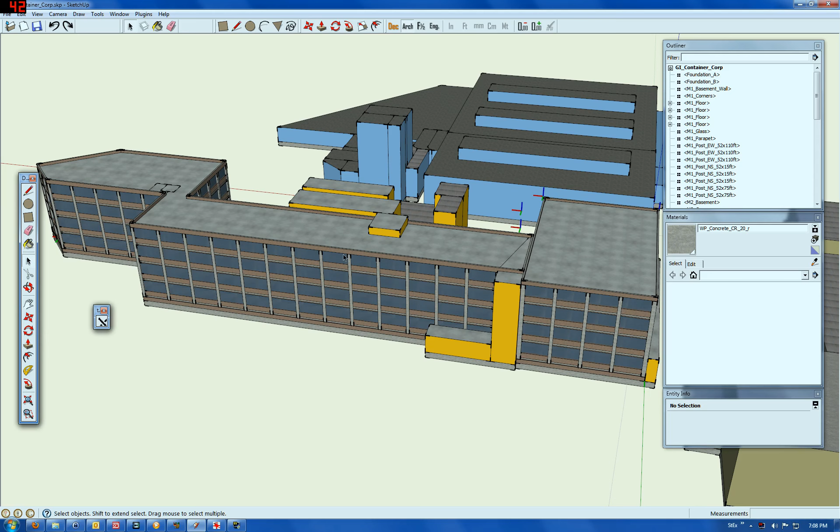As you can see, I've added more details to the mill building. I've basically followed the same techniques that I did before, adding the parapet here along the top, figuring out where the vertical elements go, where the floors are, and so on. I just basically ran it all the way across. Sometimes it was a little bit more difficult to fit in down here on this angled edge, and that's not uncommon. The angled portions of the building proved to be problematic.

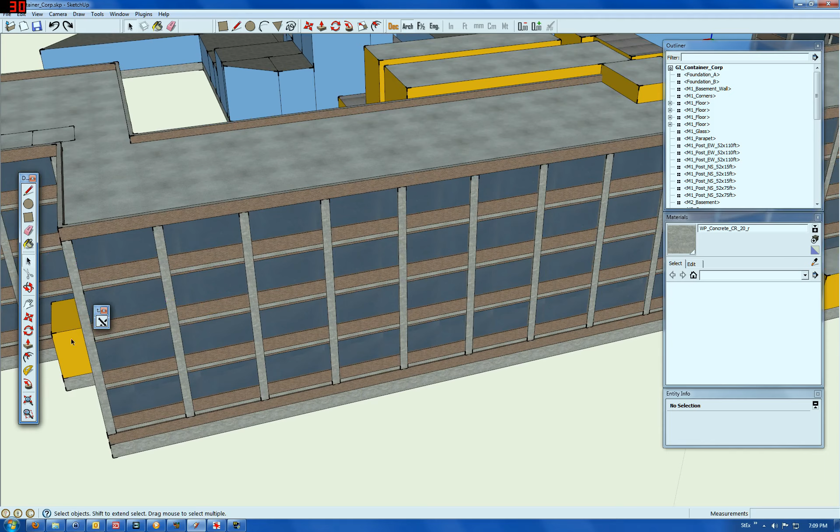One of the things you'll see that's different from what you saw before is there are fewer of these reinforced concrete vertical elements. And the reason for that is when I was putting together this wall, it wasn't going to go together evenly when spaced the way I had done the first building. But if I were to increase the distance, I think I went from a 12-foot span to an 18-foot span. It worked on this face, and coming back here, it worked on this face, and it works over here as well.

And so what I got out of that was my initial guess of using the 12-foot spacing worked initially, but as I continued on working through the model, I realized it was the wrong value. And so I just basically pushed a few things around, removed the extraneous elements, and it's okay now.

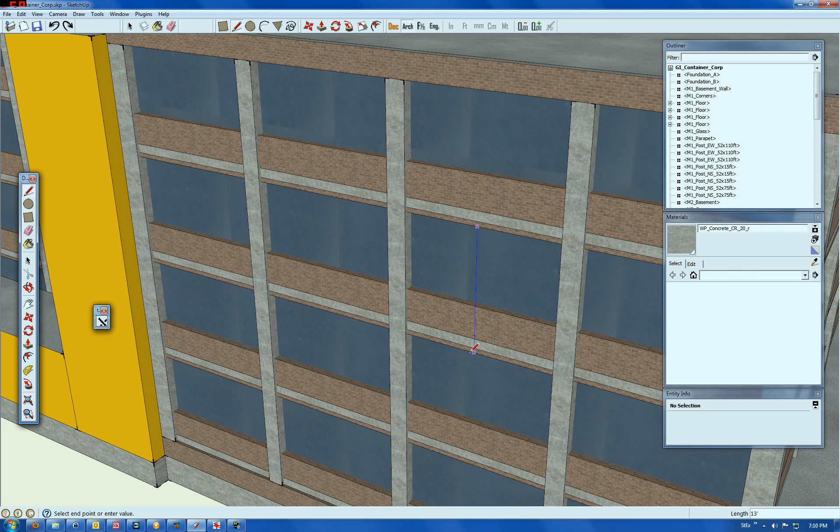Now, next thing is doing a reasonableness check on my work. I noticed that if I measure from the bottom of the brick here to the bottom of the brick there, it's 13 feet, and on down to the bottom of this, it's 26 feet. So those spaces are right. But when I raise it up here, it's only 12.5 feet. And so that tells me I've done something not quite right, and this distance here is too tight.

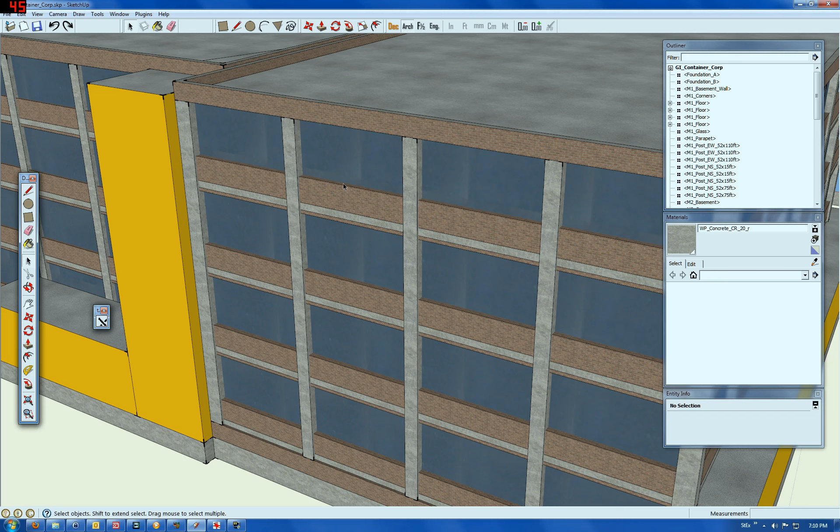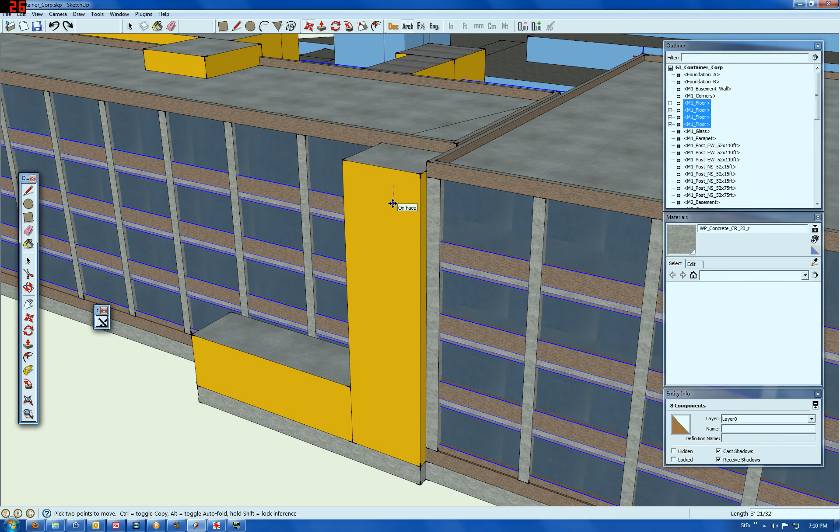So in thinking about that, what I decided to do was drop these floors. I'm going to select all of them, and I'm going to select these floors as well because the problem exists over here as well. And I'm just going to move everything down 6 inches. Okay, and now when I measure from bottom of the brick up, it's 13 feet, and it's 13 feet down. And so you can see by virtue of making all of these things components, it was very easy to make an adjustment that I was able to affect across the entire structure.

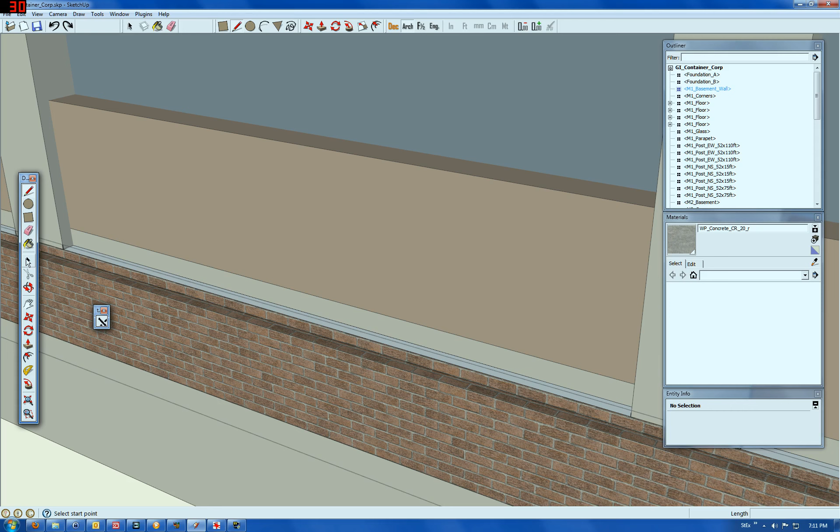Now, having done that, come down here and I see, well, now this basement section is probably too tall. So I'm going to just edit that component, and I'm going to drop it down 6 inches. I've got a little bit of something extra here that I probably don't want, and that's right in here. And I'm just going to delete that. Got extra line in there, extra line in there, and there we go. So now that is the same spacing as above.

Not true over here, so I'll edit this one as well, and I'll push this down 6 inches. And again, because it's a component that I've stretched across the whole building, it applies everywhere. And now, of course, you can see there's a gap here. And so thinking, okay, what do I really want to do with that gap? And I decided I'm going to get rid of the basement idea.

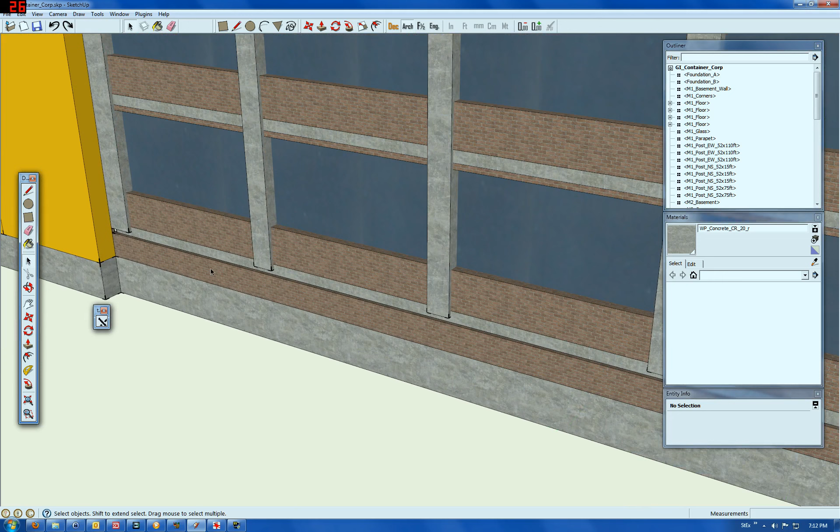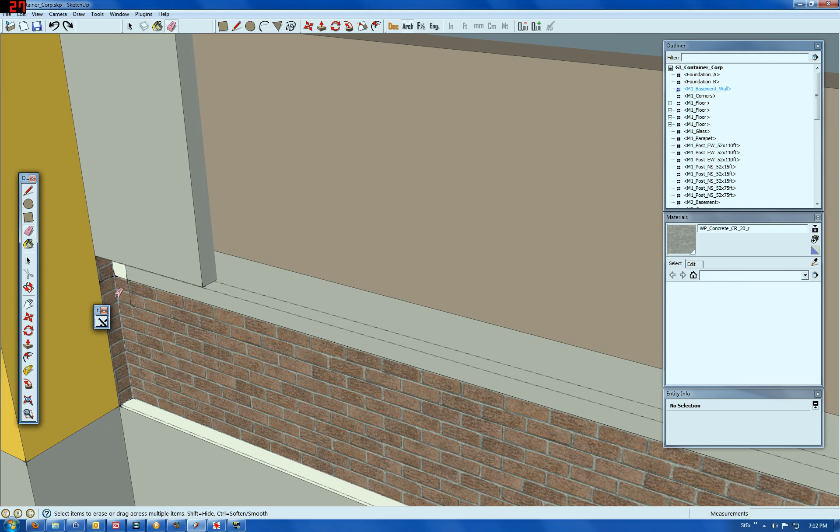And so I'll go back here to the original one, and I'm going to edit that, push it in 4 inches, get rid of the extra, get rid of that, get rid of that. Just a little bit of cleanup here. I'll go around and get 4 inches on the other sides off camera, but I'm going to do this one over here first. I'm going to put this one in, also 4 inches.

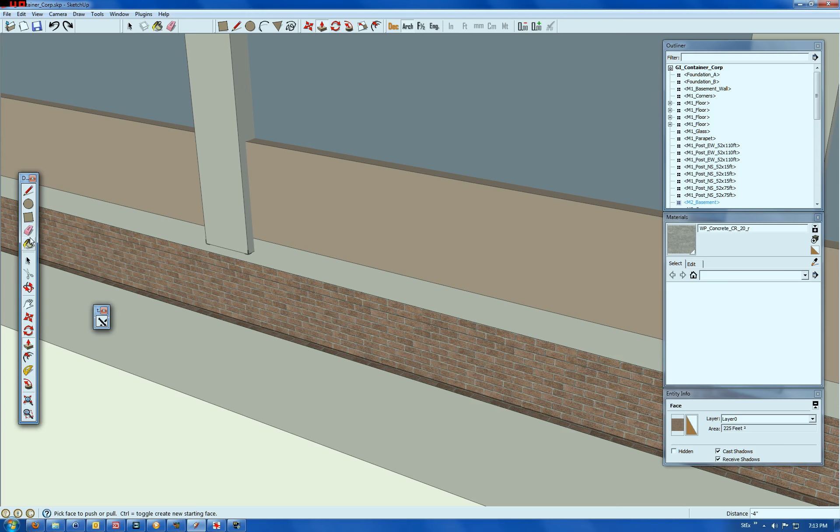This over here goes in 4 inches. And I'll continue around again, getting the rest of it positioned properly and doing my complete cleanup.

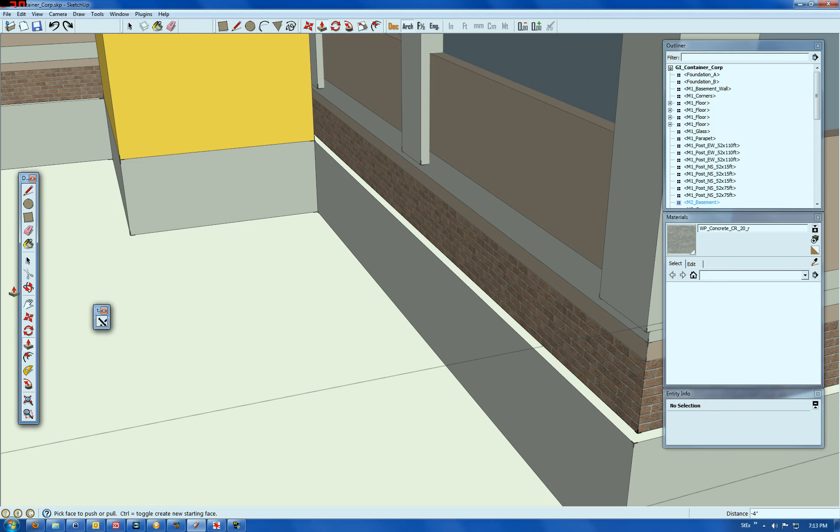But before I do that, I wanted to point out, now as a consequence of moving this basement wall in 4 inches on every side, now it makes sense that these posts go all the way down to the foundation, and that the foundation itself has a top surface on it. So I'm going to add the top to the foundation, and that's easily done in SketchUp.

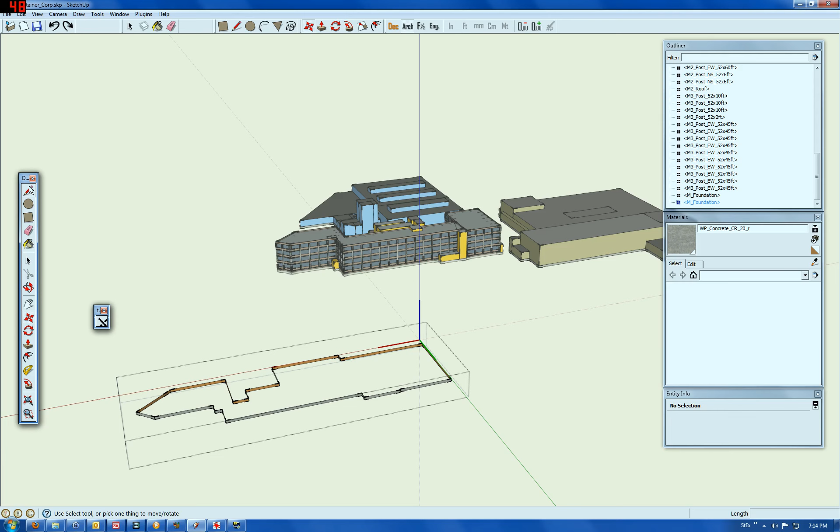You just basically connect 2 points, and it's going to figure out where the face is. And so that is now taken care of on this copy. Get rid of the copy. We go back and we see, yes, there it is.

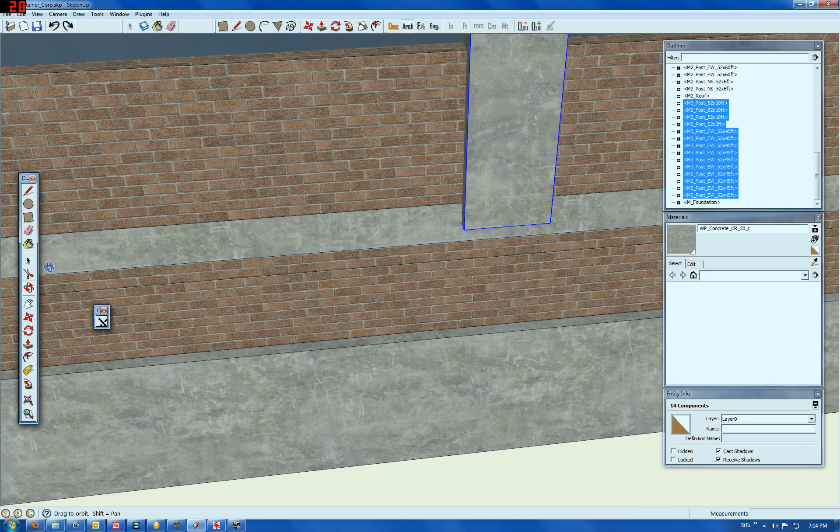And then the posts. I've got all of these posts, and the easiest way to deal with the posts is simply select one, use the Shift key to select a bunch more. I've got a whole bunch of them right there. I'm going to just drop those all at once, straight down 36 inches.

I'm going to get another bunch of them wherever they happen to be. I don't even have to see it. I know they're going to go down 36 inches, so I type that. And I have the last set of posts, wherever they happen to be. Move them down 36 inches too.

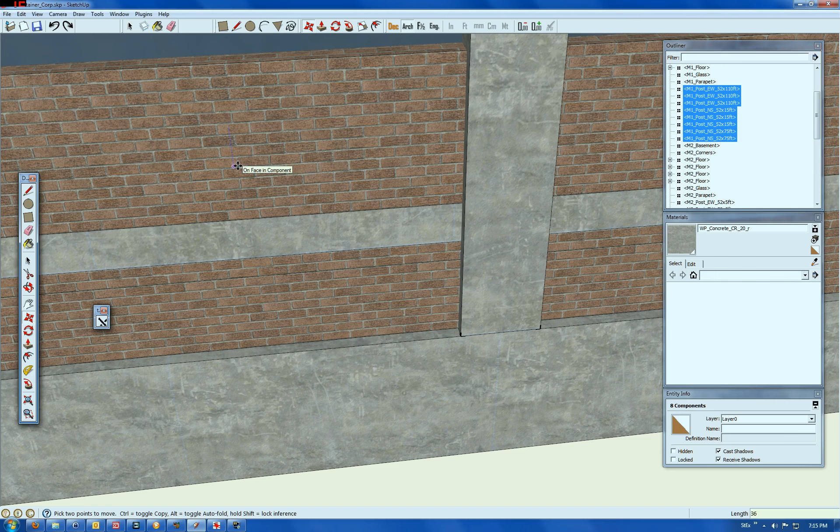And now when I'm doing this move, I am paying attention that it's on the blue axis. I don't know if you noticed the cursor stepping out there, indicating it was a blue axis, but it was there. And I'm going to do this on the corners. I'm just going to grab one of the corners, bring it down 36 inches as well.

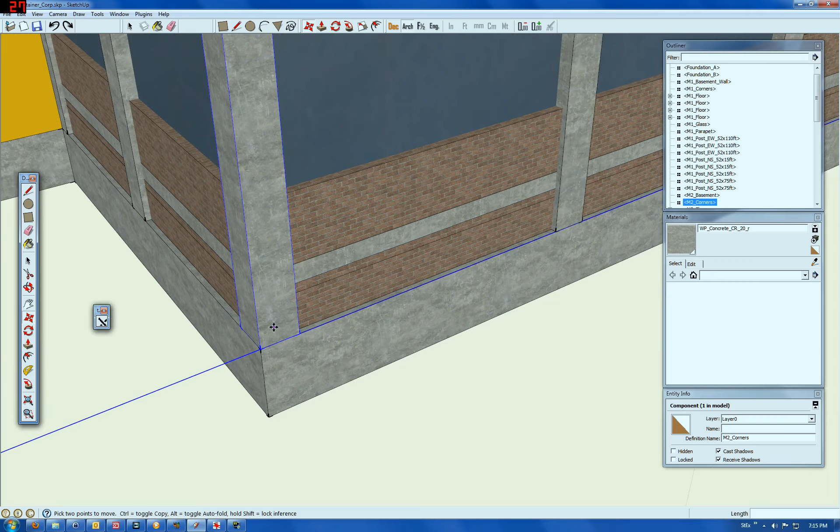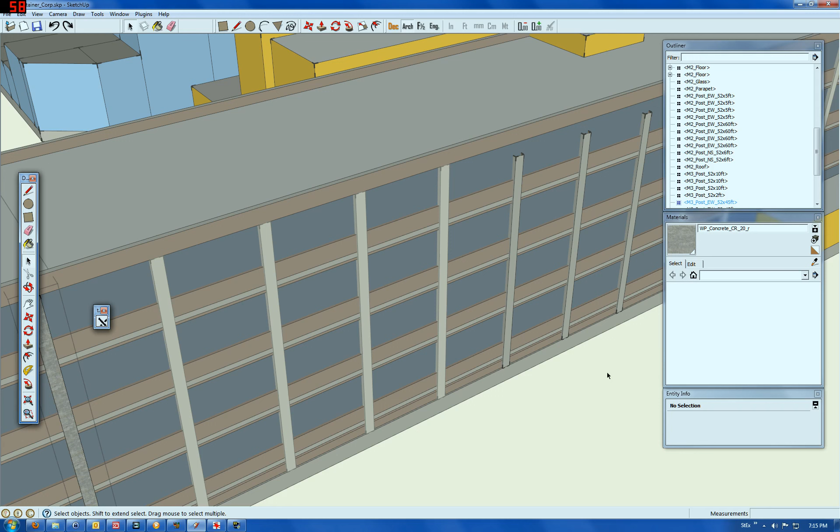Alright, and you can say, well, that looks great, except all this stuff up here at the top. Now there's a gap here at the top. And so I fix that by giving me a face I can pull on and lifting it up. And that does all of those. And I can repeat the exercise over here on this post.

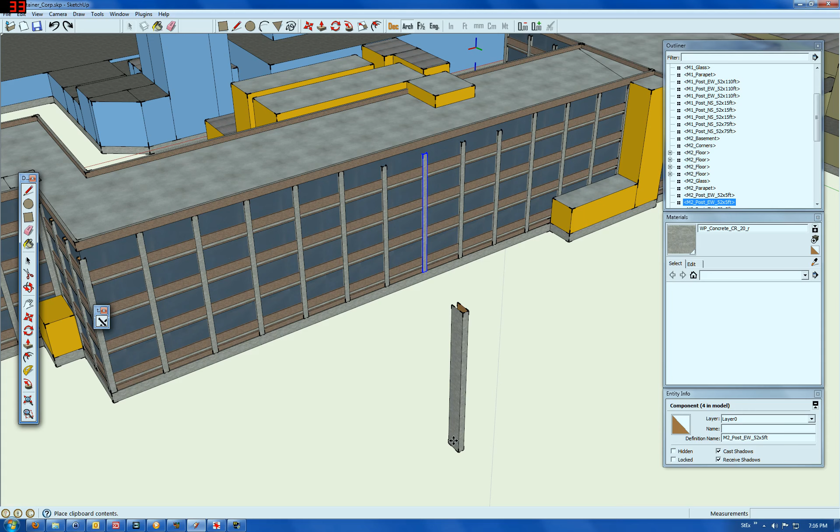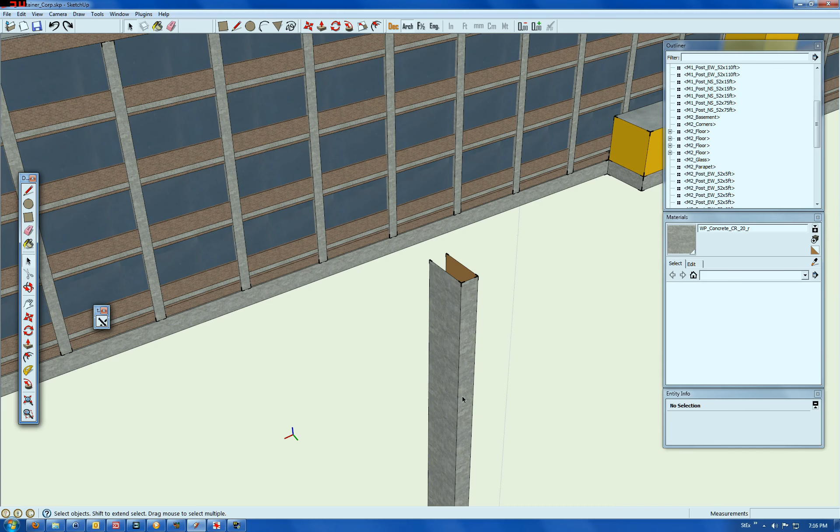Better pull this one out because it's not complete on the inside. So I'll do Control C, Control V. So I have to add the line here. And now if I do this up 36 and then get rid of my temporary face. Don't need this copy out here in the open anymore. And you can see all these now look right.

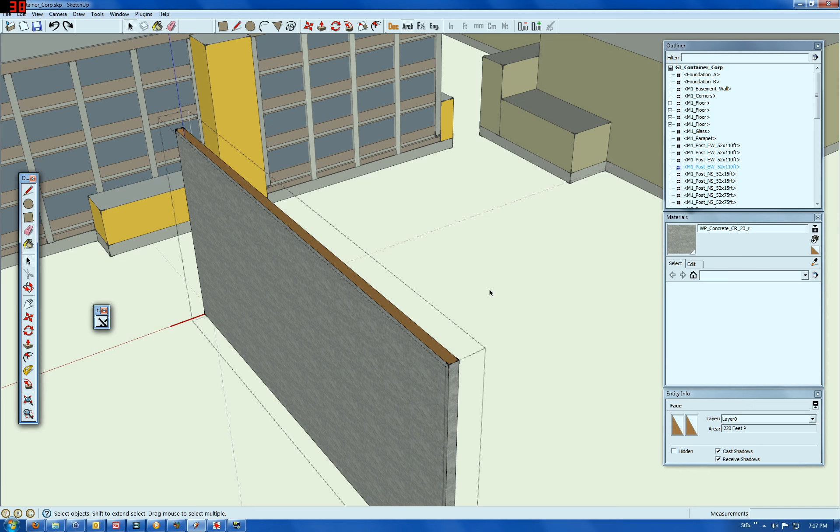These are incorrect. If I grab one of those, Control C, Control V, add the face, pull it up 36, remove the temporary face, remove the extra copy. Once again, it's a component, so my changes apply to these other areas.

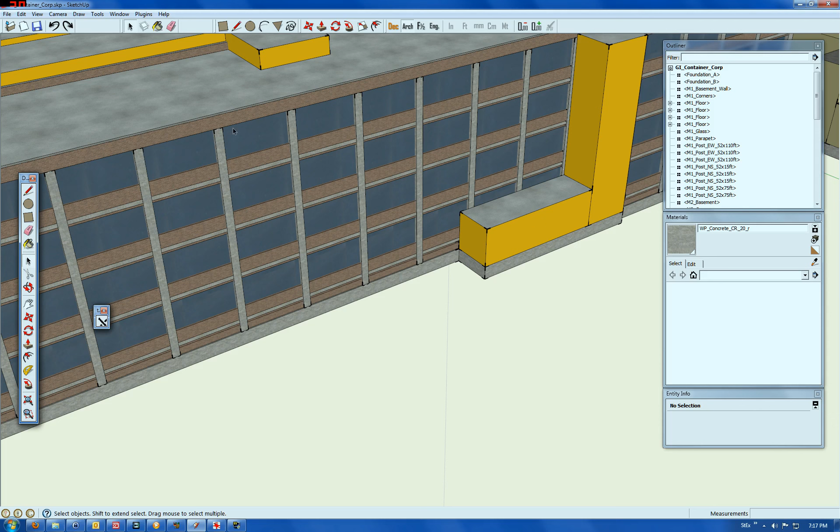Now, I'll continue around and I'll fix the components everywhere else. I don't need to do that on camera. But I wanted to show you how, when you're doing one of these things, you will occasionally find that you've made a goof. And I wanted to point out that, yeah, I made a goof. And because there's so few individual unique elements in here, these are all basically copies of everything. Even though you goof, it's fairly straightforward to put them back together in the right order again.